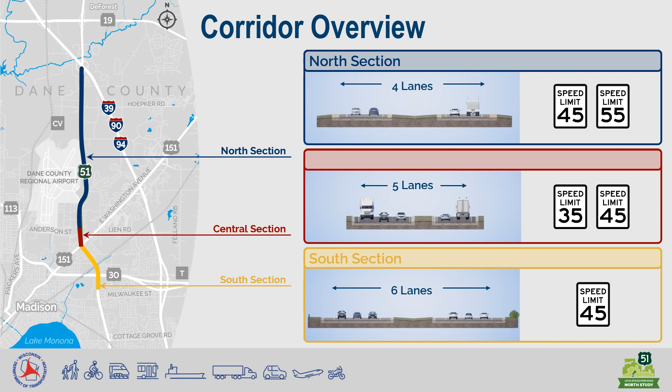These needs, along with the input received from stakeholders, are what have driven the development and refinement of the improvement alternatives. They are also a key factor in the identification of the recommended alternative. More detailed information on the corridor needs can be found on the meeting exhibits.

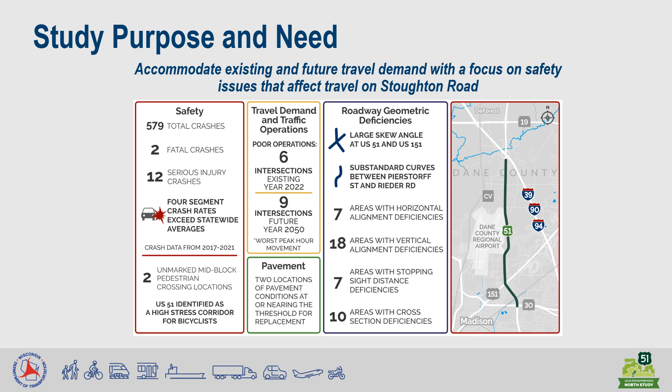Please note that the recommended alternative may change as the study moves forward, and the feedback received from stakeholders will factor into any changes that are made. Finally, the remainder of this presentation will focus on build alternatives that address the study purpose and need. However, there is also a no-build option throughout the corridor. This is an option where no improvements would be made beyond routine maintenance.

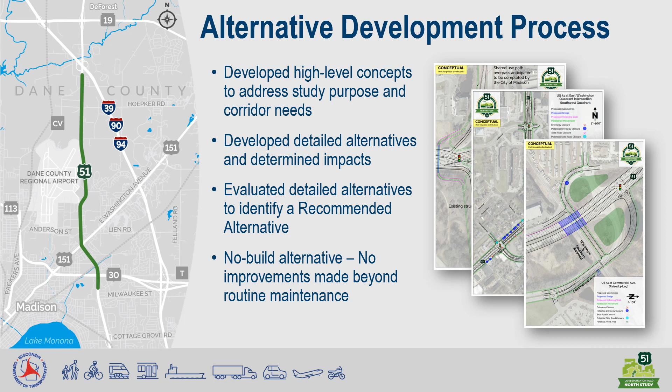The alternatives throughout the corridor focus on intersection improvements because that is where the majority of the safety and operational issues occur. In addition, capacity expansion or adding additional lanes to the US Highway 51 main line throughout the entire corridor is not anticipated. However, one alternative at the East Washington Avenue intersection would require an additional mainline travel lane through the intersection to address the operational needs.

Potential bicycle and pedestrian accommodations have been developed throughout the corridor. In general, a shared use path is proposed on the east side of US Highway 51 that would extend from State Highway 30 to Kinsman Boulevard and from Hoepker Road to I-39. In addition, bicycle and pedestrian accommodations such as crosswalks are proposed at all signalized intersections between State Highway 30 and Hoepker Road.

The study team is also evaluating reducing the speed limit between State Highway 30 and East Washington Avenue from 45 miles per hour to 35 miles per hour. The primary reasons for evaluating a lower speed in this area are to reduce potential impacts and stakeholder feedback received. In order to promote lower speeds in this area, the existing rural shoulder would be removed and curb and gutter would be extended the length of the section. Proposed roadway cross-sections can be found on the roll plot exhibit.

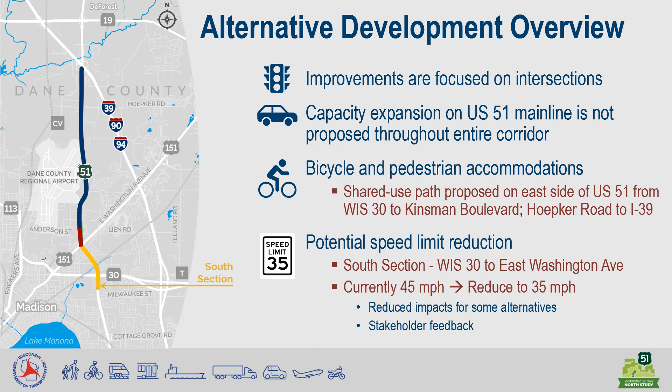The following slides provide a brief overview of the alternatives that are being considered at each intersection throughout the corridor. More details for each intersection alternative can be found on the meeting exhibits, including pros and cons, potential changes in access, anticipated property impacts, and new side road connections.

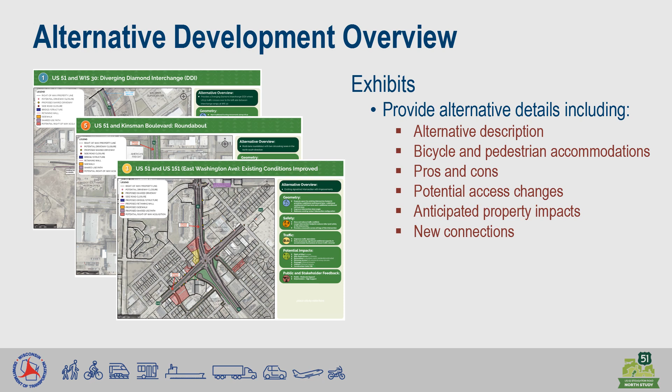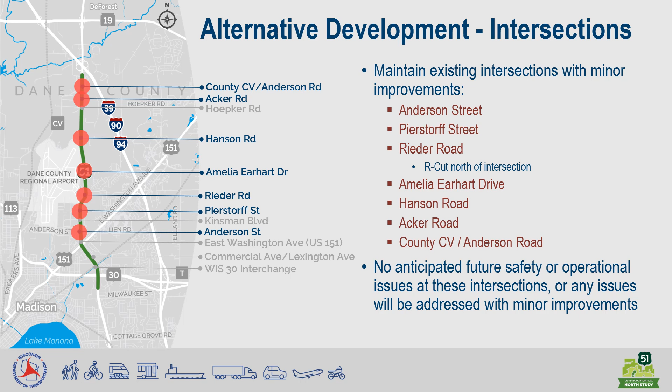Please note that one option being considered is constructing a restricted crossing U-turn, or R-cut, approximately 900 feet north of the Rieder Road intersection. This would give vehicles that currently make a U-turn at Amelia Earhart Drive to travel southbound on US Highway 51 the ability to do that sooner, which would also remove these vehicles from the Amelia Earhart Drive intersection. Finally, at the last public involvement meeting, there were two alternative concepts under consideration at Hanson Road. Since that time, the restricted access option was dismissed from further consideration due primarily to stakeholder feedback.

The other intersections along the corridor have more than one alternative under consideration, and each will be discussed in more detail on the next few slides. They include the State Highway 30 interchange, Commercial Avenue, East Washington Avenue, Kinsman Boulevard, and Hoepker Road. A recommended alternative has been identified at each of these locations.

As a reminder, the recommended alternative is the alternative that the study team feels best addresses the study purpose and need, taking into account the potential impacts and magnitude of costs of the alternatives, as well as the feedback received to date. The recommended alternative may change as the study moves forward, and the feedback received from stakeholders will factor into any changes that are made. More information on specific improvements included in each alternative, as well as specific factors considered in the identification of the recommended alternative, can be found on the exhibits.

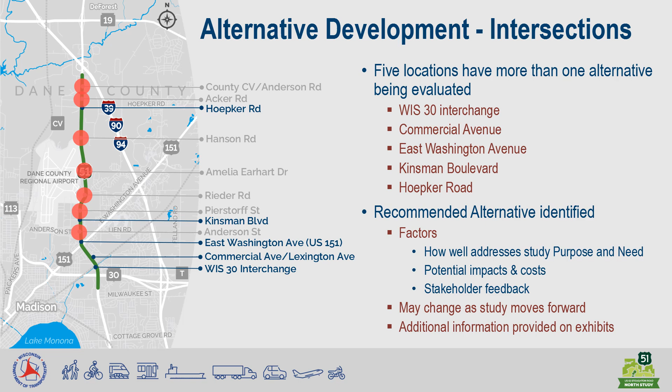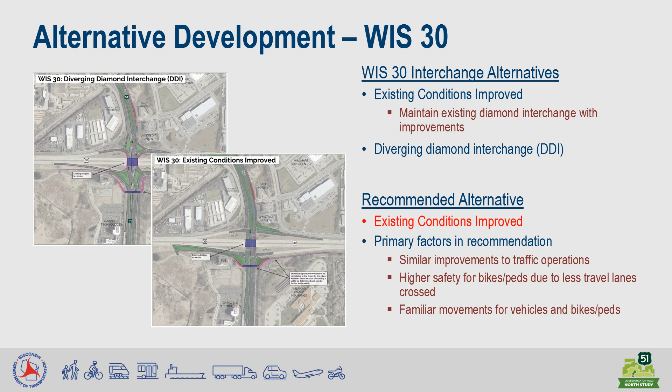At the State Highway 30 interchange, there are two alternatives under consideration: the existing conditions improved, which is maintaining the existing diamond interchange with improvements, and converting the interchange to a diverging diamond interchange. The study team is recommending moving forward with the existing conditions improved alternative. The primary reason for this recommendation is that this option has similar traffic operation benefits to the diverging diamond interchange, but is anticipated to be safer for bicycles and pedestrians and is more familiar to users.

The next intersection to the north is Commercial Avenue. One thing to note here is that the WSOR Railroad is located just south of the intersection, and this rail line would likely be utilized if passenger rail comes to Madison.

At the last public involvement meeting, there were three alternative concepts under consideration. Since that time, the right-in, right-out concept was dismissed from further consideration due to design concerns, larger impacts than the other concepts, and stakeholder feedback.

The remaining two alternatives include the existing conditions improved alternative, which is maintaining the existing signalized intersection with improvements, and a three-legged intersection that would take US Highway 51 over the railroad tracks.

The study team is recommending moving forward with the existing conditions improved alternative. The primary reasons for this recommendation are that this alternative has similar safety and operational benefits to the three-legged intersection, but has considerably less cost and impacts.

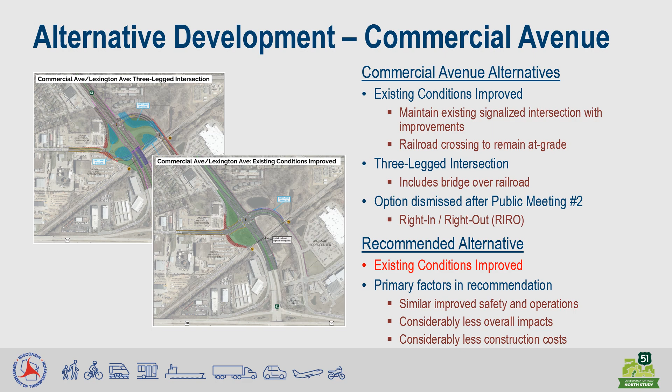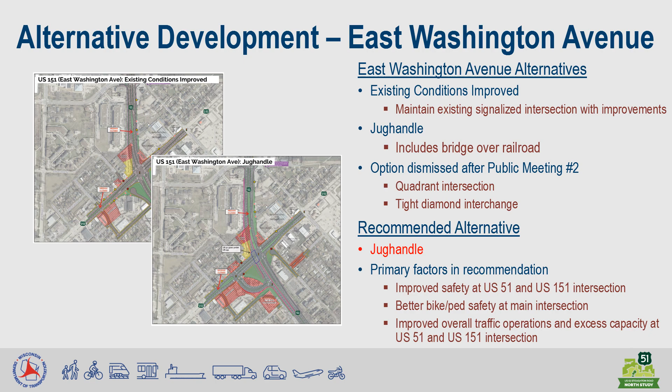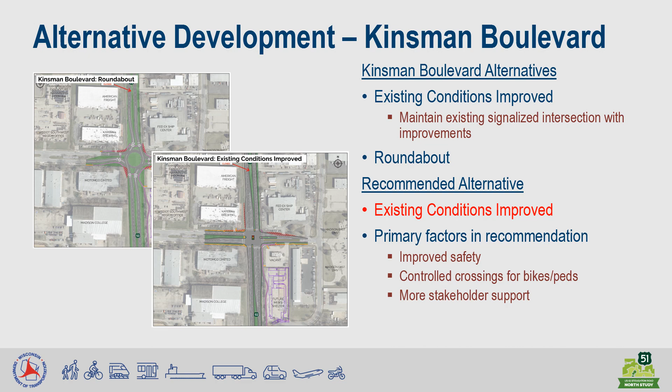The primary reasons for this recommendation are that while both alternatives provide safety and operational benefits, the existing conditions improved alternative has controlled crossings for bicycles and pedestrians and has received more stakeholder support.

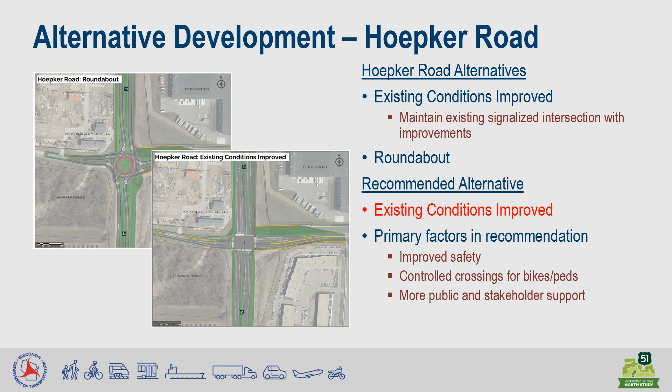The primary reasons for this recommendation are that while both alternatives provide safety and operational benefits, the existing conditions improved alternative has controlled crossings for bicycles and pedestrians and has received more public and stakeholder support.

Based on the feedback received from this round of public involvement, the alternatives will continue to be refined and the study team will determine what changes, if any, should be made to the recommended alternative. This could include selecting a different option for the recommended alternative at intersections throughout the corridor.

This will occur over the next few months. A preferred alternative for the corridor will then be identified, which will be the alternative that the Wisconsin DOT would plan to move forward with and eventually construct.

The environmental document for the study, which will provide information on the study purpose and need, the alternatives that were evaluated, and the impacts from those alternatives, will be published for public review in the fall of 2024, and that will be followed by a public hearing.

The study is anticipated to be completed in early 2025. Once the study is completed, the project would then be eligible to be approved for final design and construction. If that occurs, the earliest the construction of a preferred alternative is anticipated is the late 2020s.

Please consider providing feedback regarding the detailed alternatives and the recommended alternative. Your input will help determine what the long-term improvements for the corridor will be.